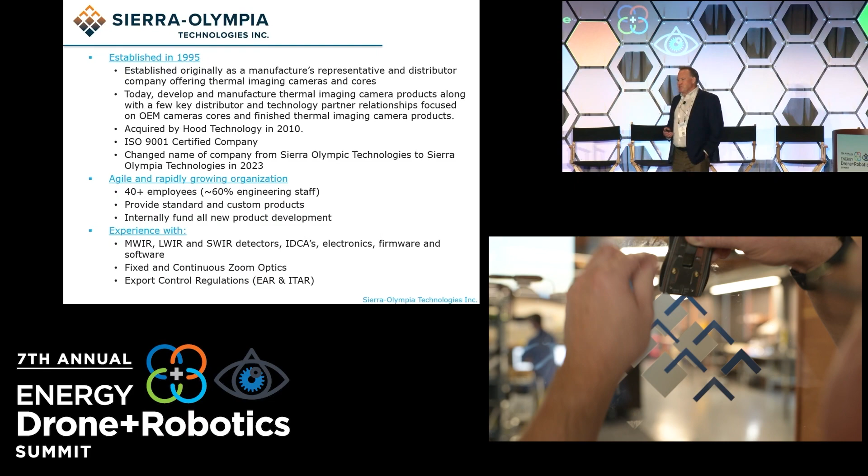Our president, Chris Johnston, started the company in Seattle, Washington, and around 2010 we moved down to Hood River, Oregon, right on the banks of the Columbia River between Washington State and Oregon. We also had a name change that went into effect at the beginning of this year. There's an exclusion area in the United States for the use of the word Olympic, and when we moved down to Hood River, nobody had ever done a name check. When we started the trademarking process, the United States Olympic Committee contacted us and said we weren't in the Seattle, Washington area where we could use the word Olympic. So we had to change the name of the company to Sierra Olympia Technologies. We're still the same company and have been around this whole time.

The topic I'm going to discuss is the real-world applications for methane and hydrocarbon emissions and compliance as it relates to handheld portable OGI cameras for crewed or uncrewed systems—manned, unmanned, or drones—and then OGI cameras for ground robots, which we're seeing a lot more of on the show floor these days and which are going to be a thing in the future. And finally, optical gas imaging for fixed-mounted continuous monitoring.

It's been discussed all morning across the various panels about Quad OA and the current standard that's been in place for a number of years. For OGI, that standard is 60 grams per hour, using a 50-50 mixture of methane and propane. That equates to about 10,000 ppm, using a quarter-inch orifice. This is the current regulation we've been using OGI cameras against for many years.

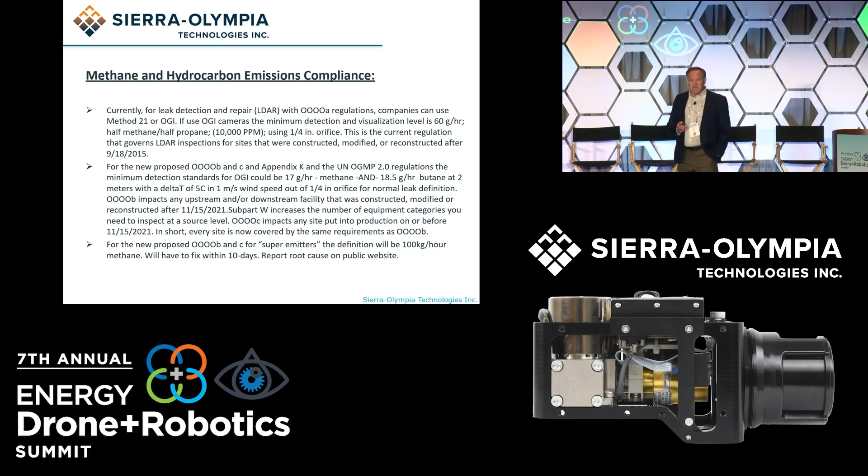It's also been talked about earlier regarding super emitters—those at 100 kilograms per hour for methane—and there are standards for how quickly you have to fix those once you've identified them.

Our technology—our cameras are called the Ventus cameras. All the product names we use at our company are oriented around the word wind, because Hood River, Oregon, on the Columbia River, is very well known for kiteboarding and windsurfing.

And the state parks and everything else around that area all utilize those names, so we borrow those names as well. But our camera technology uses what's called a HOT midwave infrared detector.

HOT actually stands for high operating temperature. For many years, when we first started using midwave cooled infrared cameras, they were mainly based on a material called indium antimonide or mercury cadmium telluride. Those materials had to be cooled to cryogenic temperatures, about minus 200 degrees centigrade or 77 degrees Kelvin.

Over the last 5 years, the United States defense industry helped pay for the development of new detectors, and we've been at the forefront of being able to implement that into our cameras. The high operating temperature just means the sensor is now operating at about 150 degrees Kelvin versus 77 degrees Kelvin, or about minus 100 degrees C versus minus 200 degrees C.

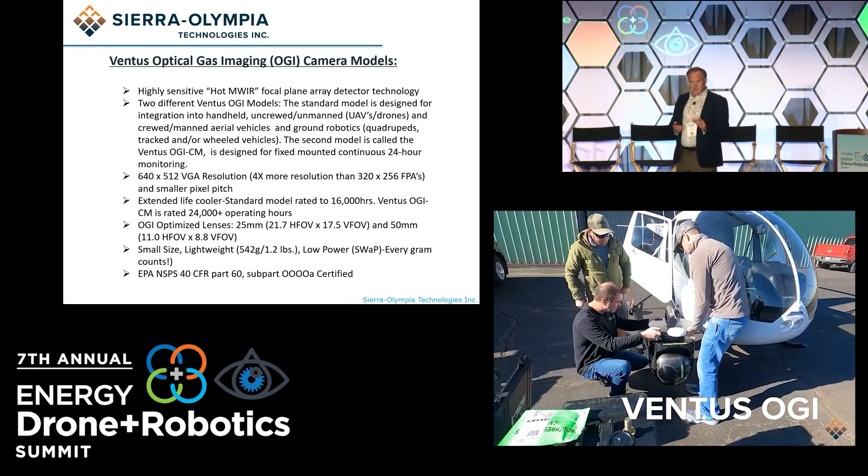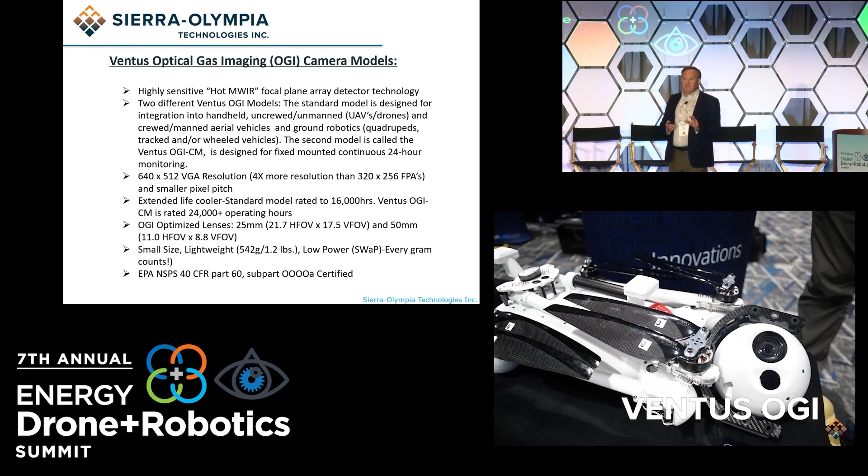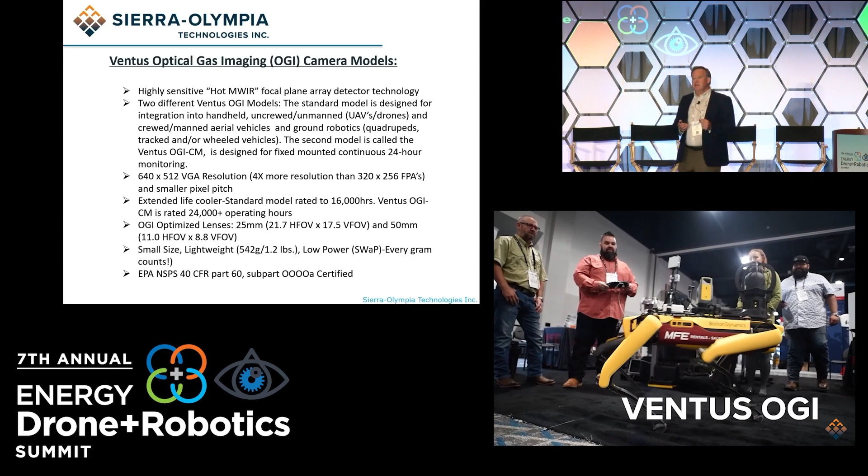The benefit of that is that the integrated Dewar cooler assemblies are much smaller, lower power, and lighter weight. It was with that in mind that we developed the Ventus, and we specifically wanted to target being able to utilize the systems for drone or UAV, crewed, uncrewed type systems, and handheld portable products to help miniaturize the technology over what it had been previously for the previous 20 years.

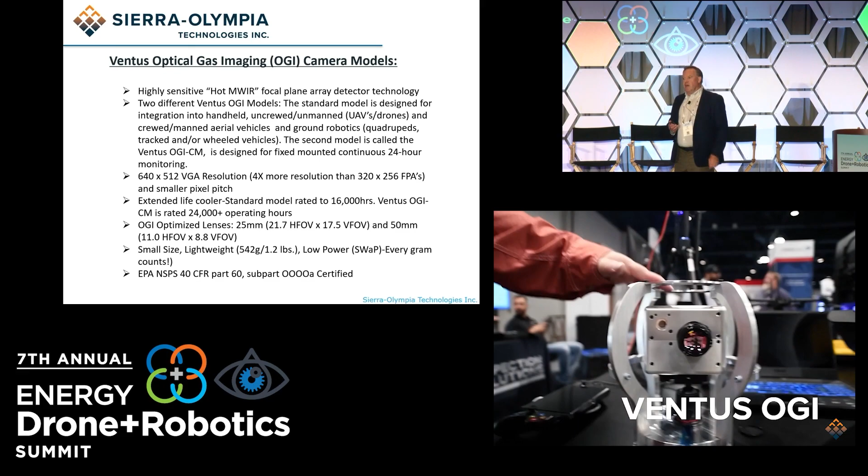So this was a really huge technological jump. The other thing that we did is we introduced the technology for the first time with a VGA resolution sensor, 640 by 512. Everything to date had always been quarter VGA, or 320 by 256 resolution. So by doing this, we were able to increase the resolution.

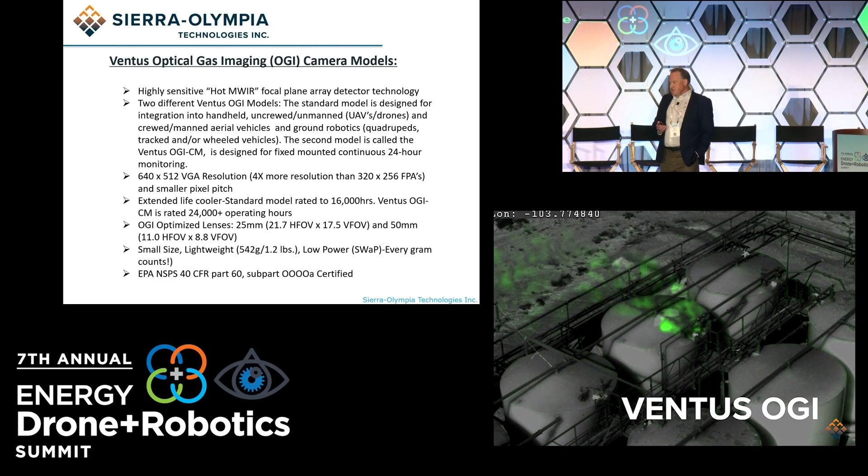You get 4 times the number of pixels. We have better sensitivity. The whole goal of that is to be able to see smaller leaks at further distances. And what we see coming in the future is then moving to high definition, so moving out to 1280 by 1024 type sensors, again with those same things in mind about being able to detect and visualize smaller leaks at greater distances.

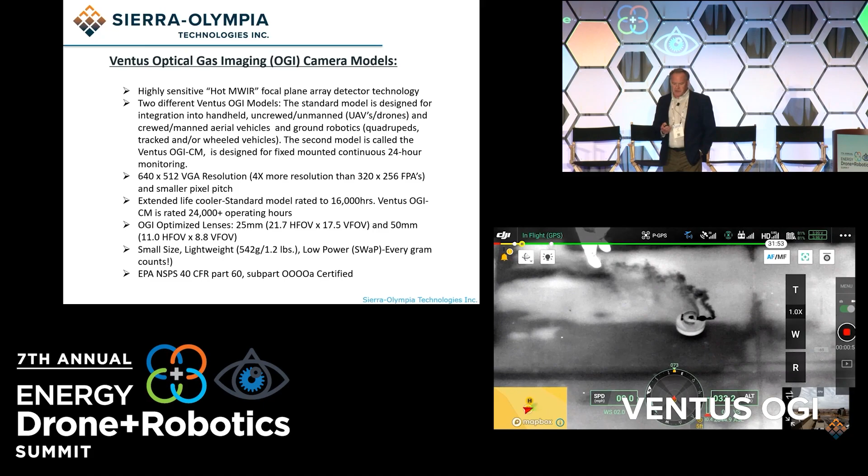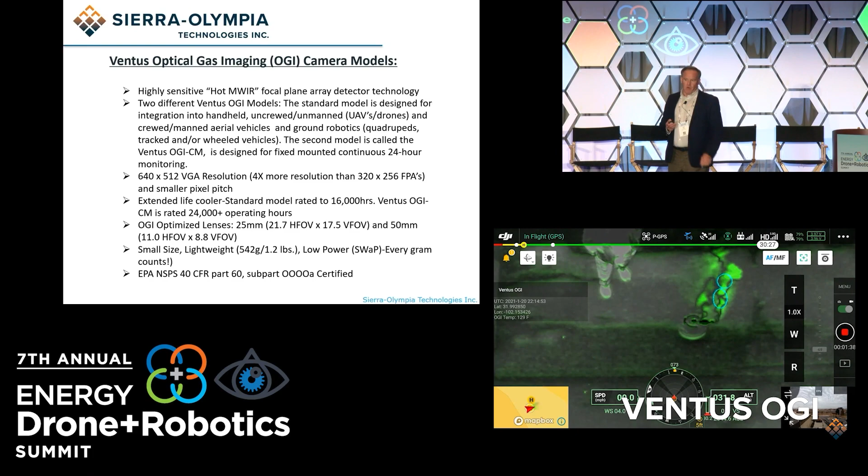The other thing about the high operating temperature sensors is the type of coolers that we use versus what we were previously using had limited life as far as how many operating hours they were generally rated for, which was about 8,000 to 10,000 hours.

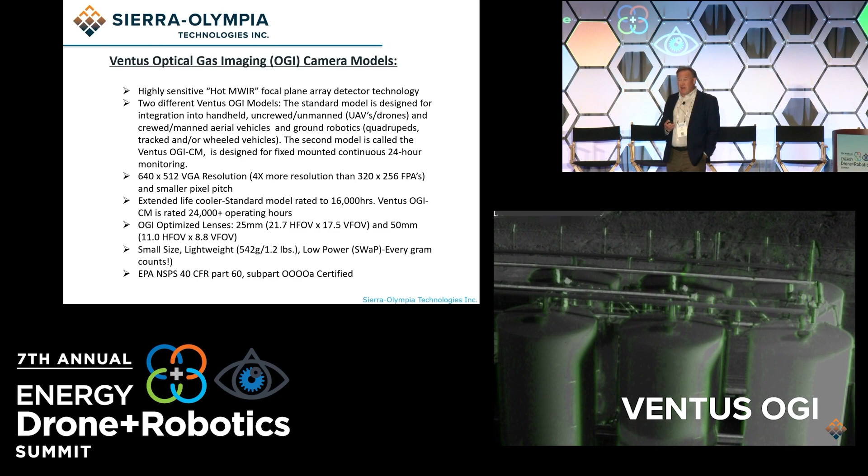Today, with these high operating temperature midwave sensors, we've increased that. We've doubled that to 16,000 to 24,000. And now some of our newest cameras are employing coolers that are going to last about 35,000, 36,000 hours.

This is super important because as we start looking at fixed mounted continuous monitoring, the biggest concern by industry is having to service the product on a frequent basis. What we're trying to do is get in front of that, so that once you install these types of systems in a permanent application, monitoring 24 hours a day, 7 days a week, 365 days a year...

...that you'll be able to have that installed and be able to run for 2 years, 3 years, 4 years, and eventually 5 years without having to do any maintenance. So by having this type of technology, it enables us to be able to achieve those goals.

And then the second part of the equation is then having this delta T that was mentioned earlier in the rule.

You want some delta T between the gas and the background, and that helps you better visualize that relative to a warmer or colder background. Typically, our cameras are able to discern that down to much lower temperature delta Ts than the 5 degrees specified in Quad OB. We're generally down to a 1 degree, 2 degree centigrade kind of delta T.

We also have a lot of image processing capabilities that help enhance the contrast of the image, so we're able to reach out and see these smaller leaks at further distances.

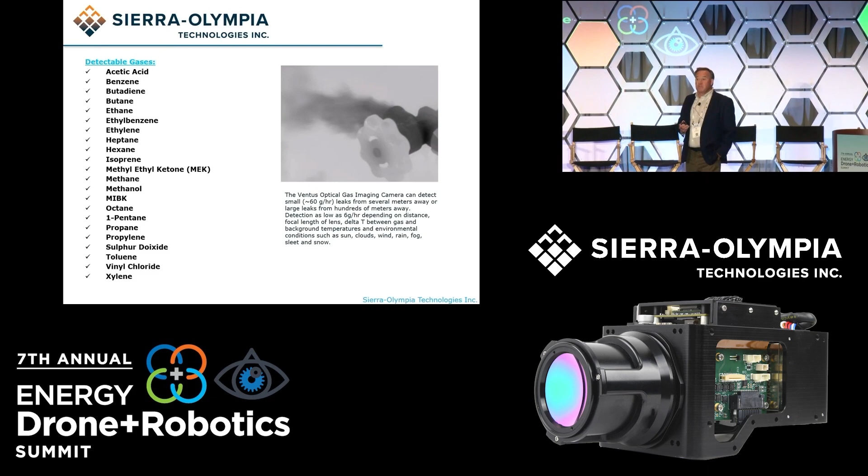Here's some applications you're probably familiar with, but maybe some of them are not. There's some new things happening in the industry, and this is one of them. All of our products are cameras as components, and what we do is enable technology partners to create finished solutions. Everything we have is basically open frame configuration with the electronics exposed, but all of our customers take our products and integrate them into something that becomes a finished used good.

This is a new product through a company called ChampionX, located here in the Houston area. Many of you may know ChampionX as a chemical type company, been around for over 100 years, and they've doubled down on emissions. They've created a whole business unit built around that, and they've been acquiring companies. But they also have individuals who really understand OGI technology, really one of the foremost authorities and the grandfather of OGI - his name is David Furry. His company was purchased by ChampionX.

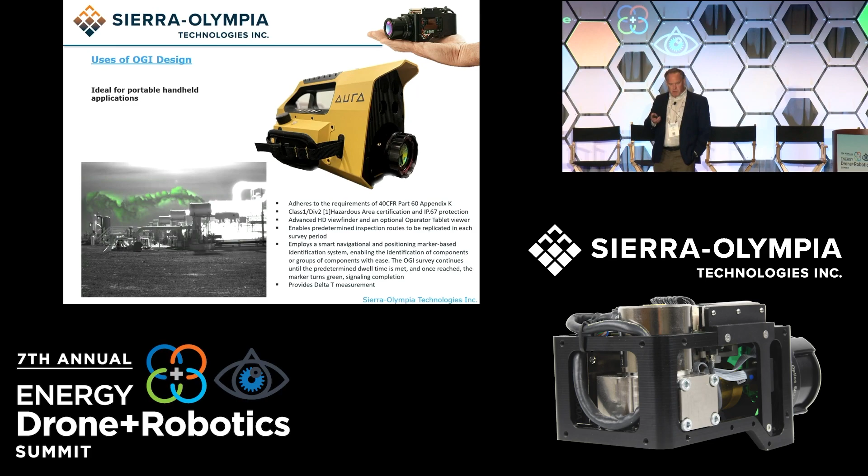What's unique about this particular camera is it's designed specifically to meet Quad OB, C, and Appendix K, and it has within it a positioning and navigational system. So you take all of your assets that you may have in SAP or JD Edwards or Oracle, whatever CMMS system you have, you upload all of those assets, and everything is geotagged at your facility.

With the handheld camera, with this positioning system called V-SLAM technology, when the operator takes the camera and holds it up to their eye, it creates and puts pins on every asset in the field of view that has to be scanned. Those pins are white at that point in time. Then once you dwell on the target for 5 to 10 seconds, whatever your standard operating procedure will be, it will turn the pin green, indicating it has been scanned.

So for traceability and auditable reasons, now you know the person actually looked at and scanned the piece of equipment. And if there is a leak, that pin can turn to a caution or critical, a yellow or red color. This is something very unique and very innovative - it adds quantification capability, and it's certified for ATEX certification, Class 1, Div 2. These are just some new things happening, all based on the type of sensor we offer.

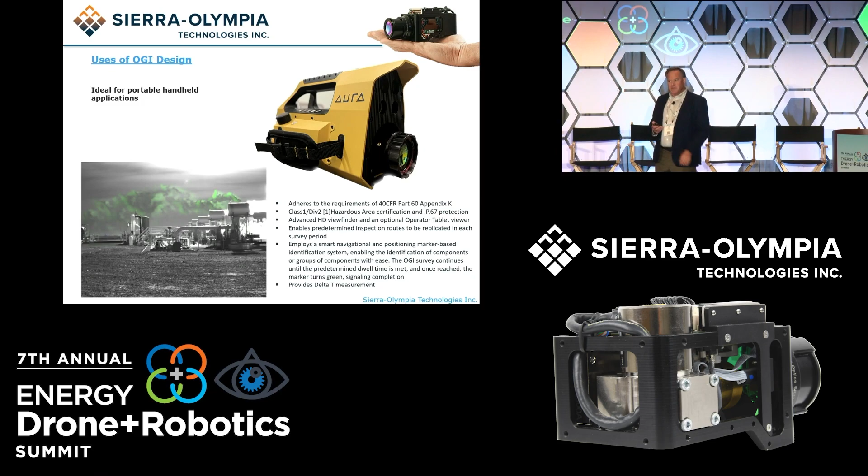There's another company on the floor called MFE Inspection Solutions, and they've done a different version of the camera, using our product in a multi-use way, where they have a quadruped robot from Boston Dynamics called Spot, and they have the OGI camera integrated on it with an acoustical device. That allows them to listen for the leak, where the camera actually visualizes so you know exactly where the point source of the leak is, doing autonomous routes using the Boston Dynamics quadruped.

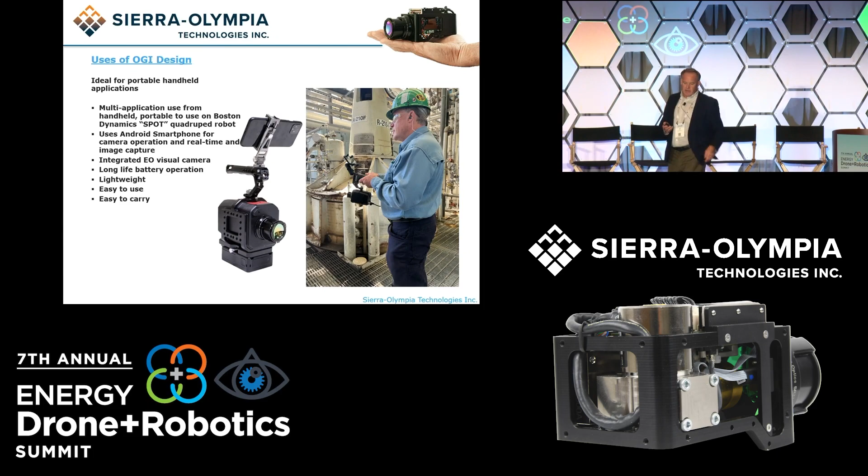You can then remove it with a quick release and make it into a handheld system, and the product is actually controlled just by an Android smartphone. Super slick, very lightweight, with a long life battery that lasts about 4 hours.

And then everybody's familiar with a lot of the drone platforms you see down there, and our product is integrated on many different ones.

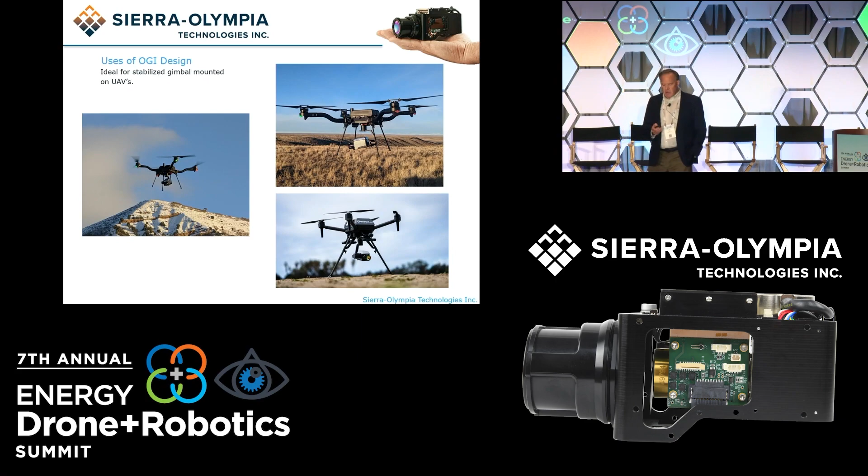In these slides, this is a company called FreeFly, with a product called Astro. About a month ago, Sony decided to jump into the business. They have a product called the AirPeak, and they are going to be in the industrial inspection business, integrating our OGI camera onto their platform with a visible light camera and an optional TDLAS.

Those will typically be combined with TDLAS sniffers, and in some cases people are also working on doing quantification optically, not using a sensor, just using the image itself.

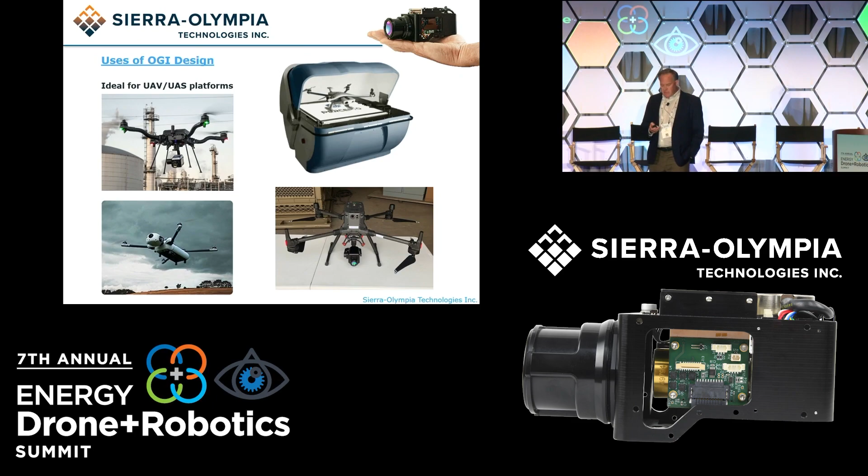Because of limited time, I'm not going to go through some of these. Just again, some of the aerial footage that I think everybody has seen.

The advantage of UAVs is the ability to cover large areas in a very short period of time, at varying height. We developed a gas enhancement mode that colorizes the gas plume, making it easier for the human eye to ascertain where the leak is coming from. The sharpness and clarity of the image is really significant, making operators' jobs of finding these kinds of emissions a lot easier and faster.

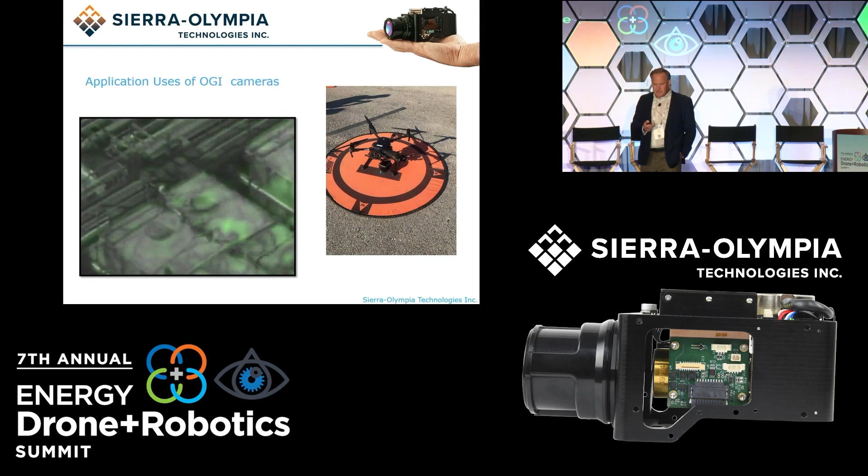We're also doing manned systems as well. This is probably one of the most mature applications, integrating them into stabilized gimbals and flying these on helicopters and fixed-wing aircraft.

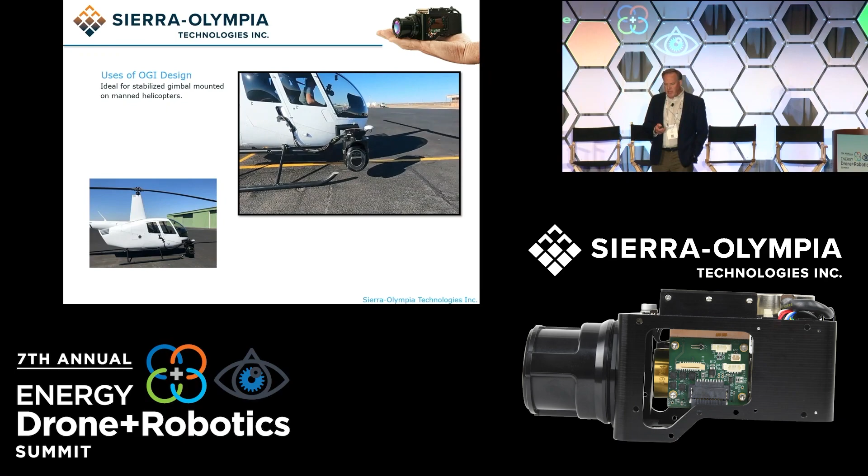Here you're not having to deal with beyond line of sight issues at this point, so this is a very viable way to cover very significantly large areas or linear assets like pipelines.

So here you're seeing overlays of the OGI onto the visible light, with laser rangefinders that precisely indicate exactly where the leak is and at what distance, besides seeing where the leak is itself.

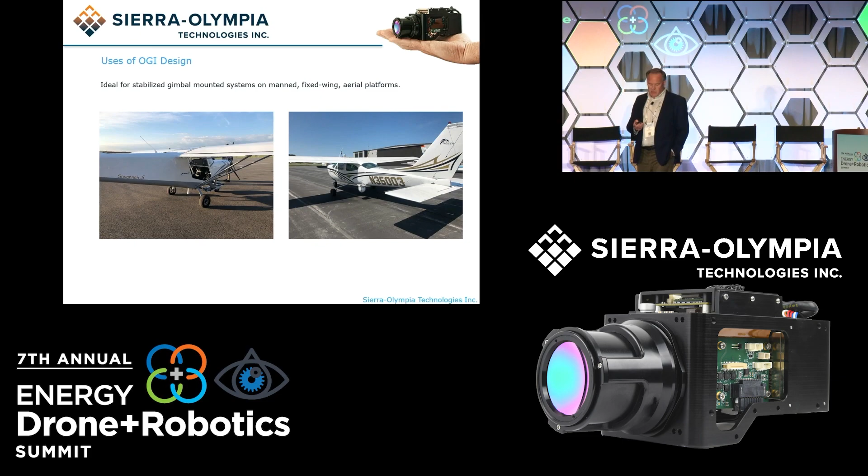For traditional pipeline patrols that people are doing for right-of-way inspections now, we have companies integrating these onto Cessna aircraft, and larger aircraft. UAVs to come will be more VTOL oriented or fixed-wing as we get waivers for beyond line of sight.

As I mentioned earlier, the quadruped type of robots — I really believe this is going to be a significant area of growth for OGI, with all the different manufacturers coming out with tracked, wheeled, and walking robots.

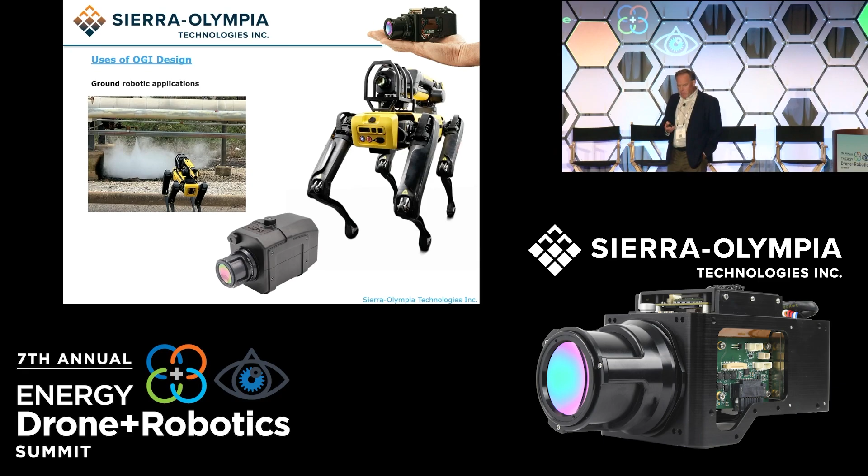The last slide I'll do here is on fixed-mounted continuous monitoring applications. This is where you have permanent mounted units. Note here that with this technology we're using a long-life cooler to improve reliability.

As companies want to scale and do this continuously, the state of Colorado is setting new standards. Any new well pad that goes in, as soon as you start putting a drill bit into the ground, you have to start monitoring it through the well's completion process. Then six months after, you have to monitor that site 24 hours a day, 7 days a week, 365 days a year, and you just can't do that with any other technology except fixed mounted.

As we see these sites grow in size and complexity, because of the cost of the sensors, we're working on new technology to help lower that cost and increase the reliability and the life of the equipment.

So I'm going to stop there since my time's up. Anybody have any questions?

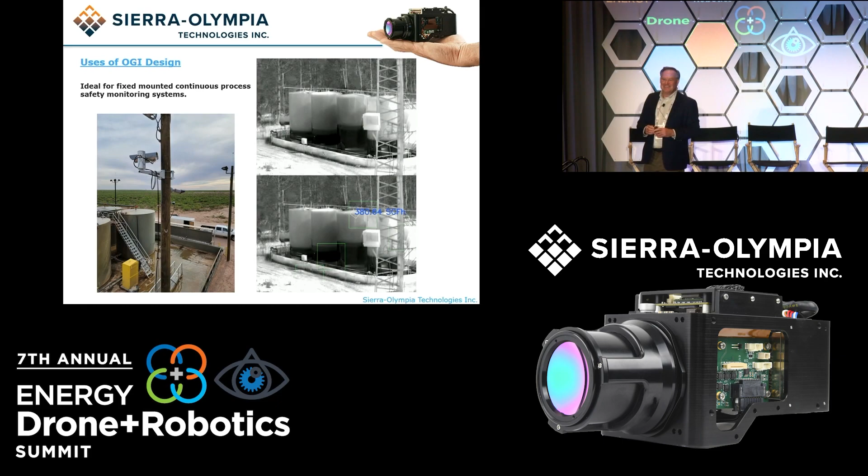Awesome. Any other questions? Anybody else? Okay, I guess that's it. Thanks, Jeff. All right, thank you.